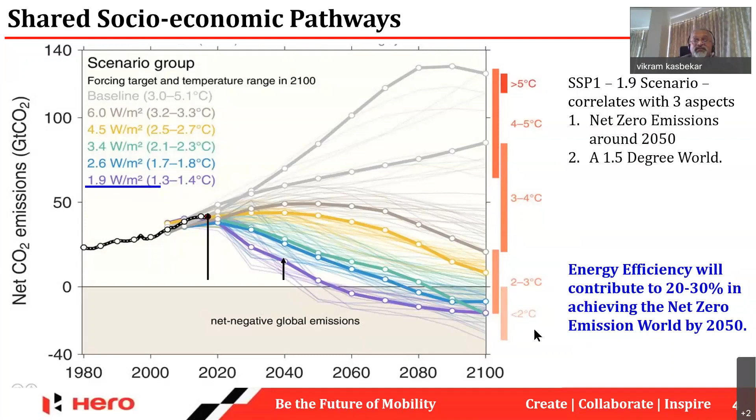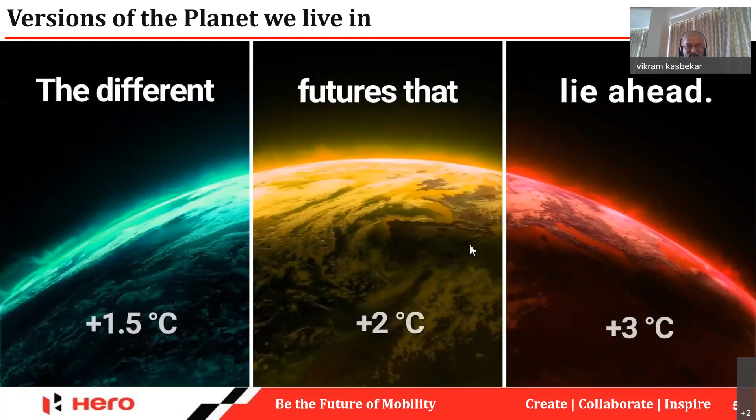So I think for the future generation, it's very important that we don't want the glaciers to melt, the rivers to dry off. Obviously this would be supported by new technology and other things that will come in. I spoke about the Paris Agreement some time back.

We want to keep warming to less than 2 degrees centigrade, ideally 1.3 to 1.4, but we normally call it 1.5 degrees. This is possible if we achieve net zero by the year 2050.

There are various innovative technologies coming through which we'll have to adapt to enhance resilience. Hydrogen has a very bright opportunity, though not in immediate terms, and even the government of India is coming up with a hydrogen policy. Going forward, these are the right steps for us to live by.

We look at Code Red. This was from the Intergovernmental Panel on Climate Change, where about 2,000 scientists came together and sounded a warning, calling it Code Red. So we have to take drastic measures now to adapt to climate change, enhance resilience, and align resources to address climate risk holistically.

It's very important that we undo what we have done earlier and harness new technologies innovatively to go forward from here.

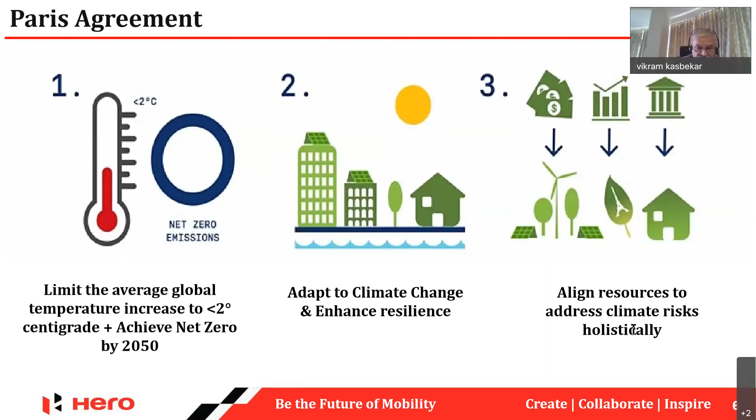I'll be taking you through some of these initiatives that have been taken at Hero.

Before that, I must say I had the good fortune of interacting with Professor Sonam Wangchuk, a brilliant person, very simple man, down to earth. He has been able to do wonders, what I've seen.

If you look at his contribution online, the ice stupas that were created, and the recent problems of pollution in the NCR region from crop burning—if the waste from crops is collected and processed, it can turn into insulation bricks.

He has also used the path of the sun, from east to west on the southern hemisphere, which gives sunlight and preserves energy inside the houses—absolutely no external energy required, using natural energy. These are low cost houses, a wonderful initiative to keep houses warm instead of burning chulhas, which create a huge amount of pollution in the Himalayan region.

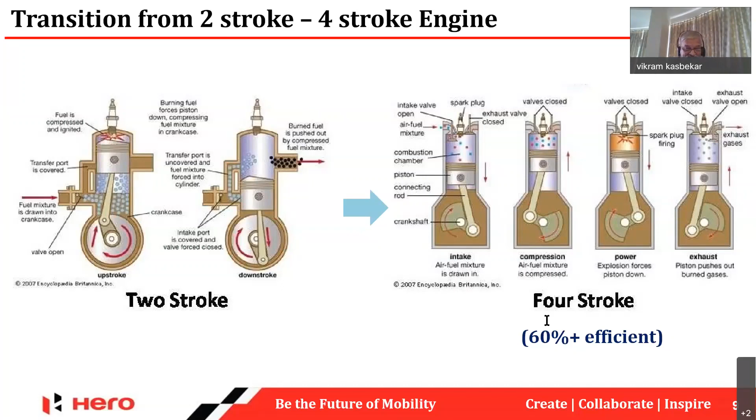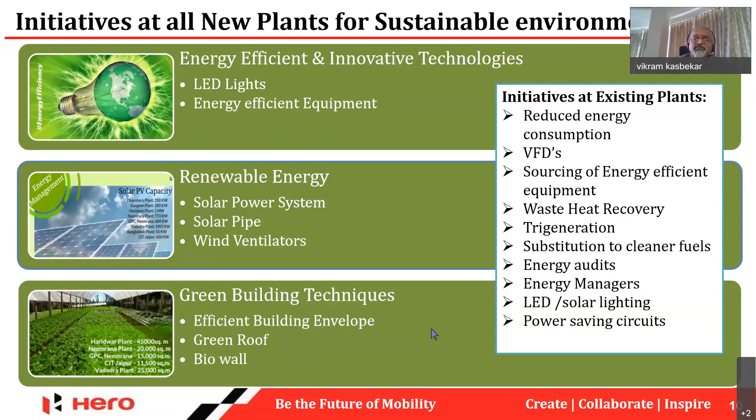On the solar plant, it is always very critical that we locate it at such an angle that when the sun moves from Cancer to Capricorn, it generally travels in the southern hemisphere from east to west, giving us maximum efficiency. One thing we have noticed is that these panels require regular cleaning to derive the best energy. During monsoons, cloudy weather and dusty atmosphere it doesn't work as well, but they operate most efficient at around 25 degrees centigrade.

If I look at the green roof initiative, this is our Haridwar plant - the largest green roof plant that we have put, 45,000 square meters of green roof. This gives a very cooling effect to the atmosphere, and there are various ways we have been able to establish this and work it out in a sustained way. In the Neemrana plant, we also have 20,000. So across all our factories and units, we have implemented the green roof.

And not only that, we have what we call generation of hydroponic plants. What you see here is a hydroponic plant, where we feed nutrients into the plants. They don't have soil, and the productivity of these plants is 5 times - whether it is cherry tomatoes, cucumbers, or any kind of vegetable, it gives huge amount of productivity. We just add some nutrients through the water.

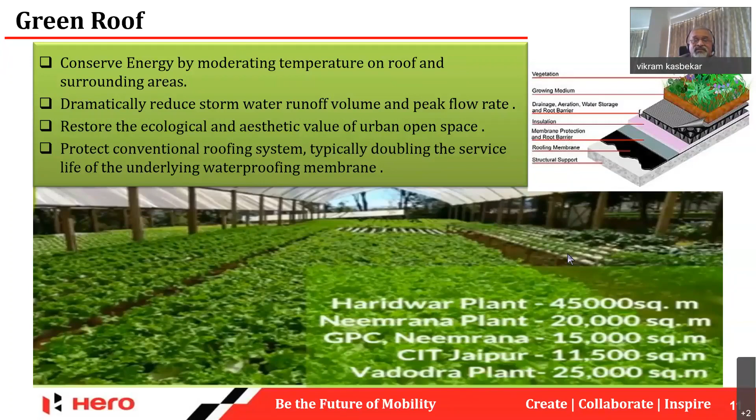And we control the temperature inside. Believe me, the lettuce and other things that you taste are really out of this world. I won't say it falls into the gamut of organic, but yes, it's not having any pesticide, and the taste is super. This is fed to and given to all our people across our unit - all our workers, officers, staff, they carry these things with them either in the canteen or at home.

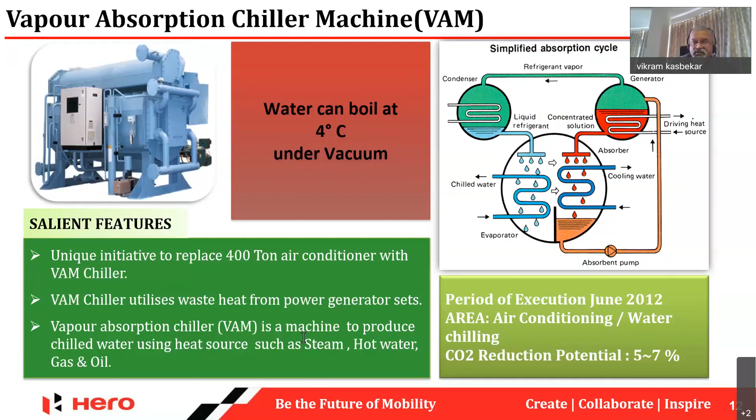So coming to the next part of it is on the technologies of VAM - I think all of you are aware of this technology, that under vacuum this is carried out. This is something that we are now using for air conditioning our offices and the engine assembly. This was done long back, where we use this VAM machine to cool our engine assembly, where earlier we were using a compressor. Now we use this technology to improve this, which is nothing but a delta T from the input coming from the heat source, which is the output of the radiator, and the input of the radiator is what we use to work this out.

This I mentioned about the solar panel. Another aspect which is very important is the cost benefit analysis.

If you have high efficiency solar panels, then the cost is high. So these are useful in areas where you don't have much space, but where you have space, a slightly less efficient one would also work. At the end of the day, it's just a cost-benefit analysis, which is very important.

We have put some pilots in some of our units, and the other part is purchasing renewable energy. So at the source, that is most efficient to avoid grid loss, and in the evening, since we are closer to the coastline, wind turbines can generate power from sunset to midnight. So both shifts sort of get addressed by this kind of energy.

Then, of course, the future energies are biomass, geothermal, hydropower. The only thing that the government of India and all the states must do is collaborate to see that the wheeling possibilities are taken care of very well.

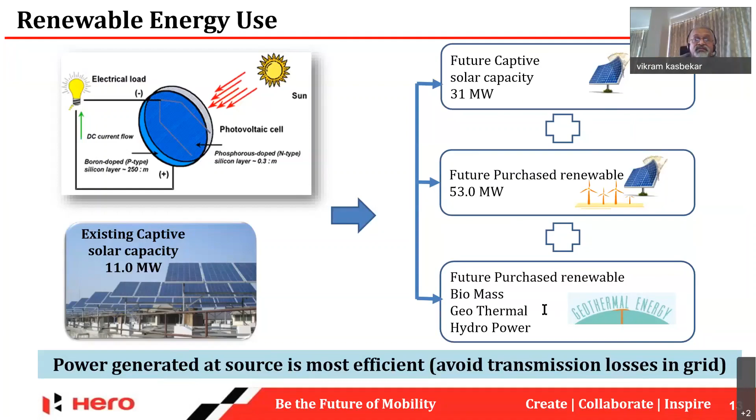So I go to the next one about utilization of waste as fuel. I did talk about the VAM chiller, the gas genset, also the exhaust for waste heat recovery of the boiler. So these things are being done continuously to improve our efficiencies, and at the end of the day, costs as well.

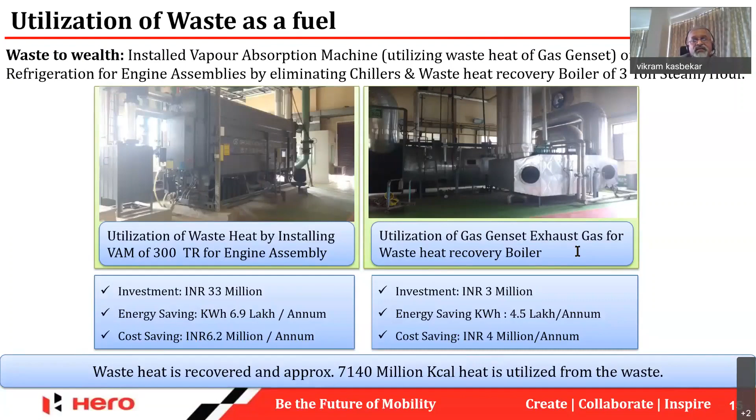Earlier we were using the waste heat recovery boiler, which was actually for burning the sludge. But today, as part of zero wastage, we don't want to burn that. We give it to the paint plant and cement plant, where it is used for co-processing.

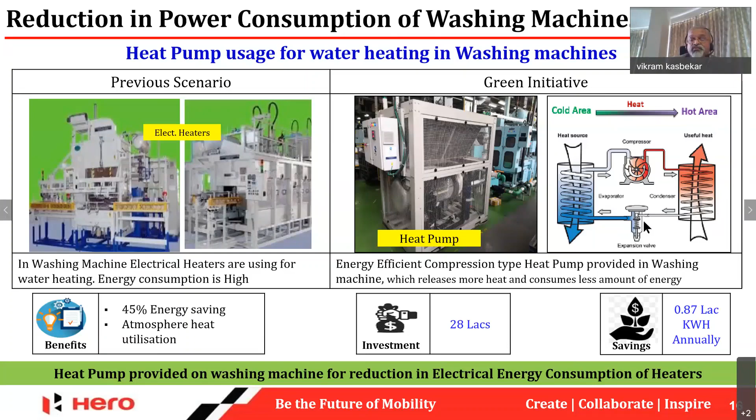Another thing is using the heat pump. Cold water is compressed, heated up, and that is taken into the preheating of the tank, so that energy utilized is less. And then, through the expansion valve, it cools down and goes back into the system.

The other thing is digitalization. Now that is the future. At the end of the day, we have got individual cockpits now at each unit, and by next year, we'll be combining this into a central unit.

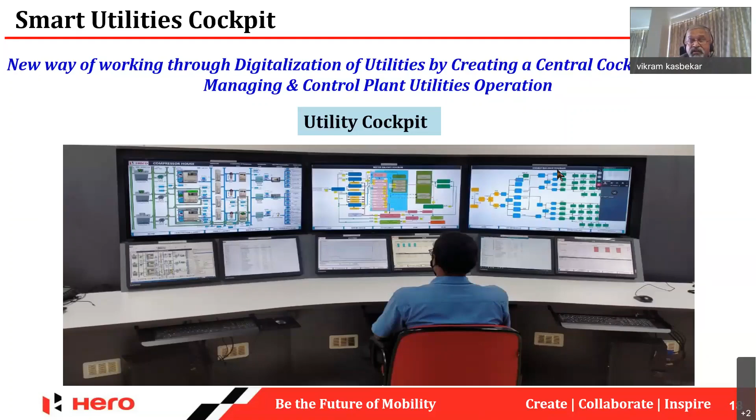So sitting remotely at some place, we'll be able to control all the utilities from one point, which will also result in good predictive maintenance—a stitch in time. We will know how a thing is going to fail and try to improve on the efficiency through real-time information.

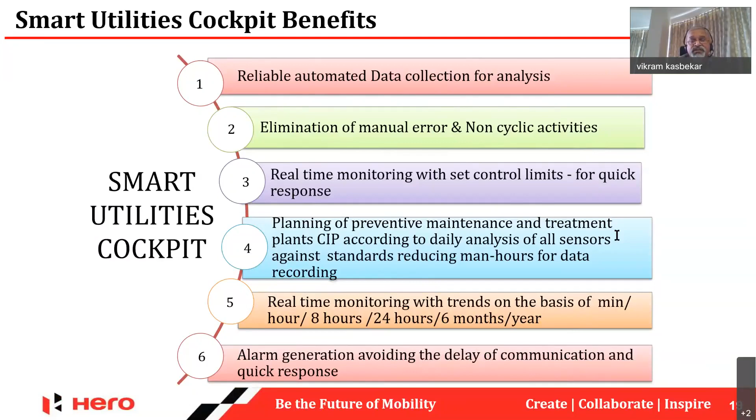The next page talks about all the benefits we arrive at with this. Of course, you need an analytics tool also to handle so much data, which gives real-time response, planning of preventive maintenance, and reducing inventory cost. So it's a win-win situation throughout, I must say.

If I look at system strengthening, which is again a very important aspect from the management point of view, a structure is very essential in a plant, and it goes like a pyramid starting from the plant head to the bottom, driving the management initiatives through this chain.

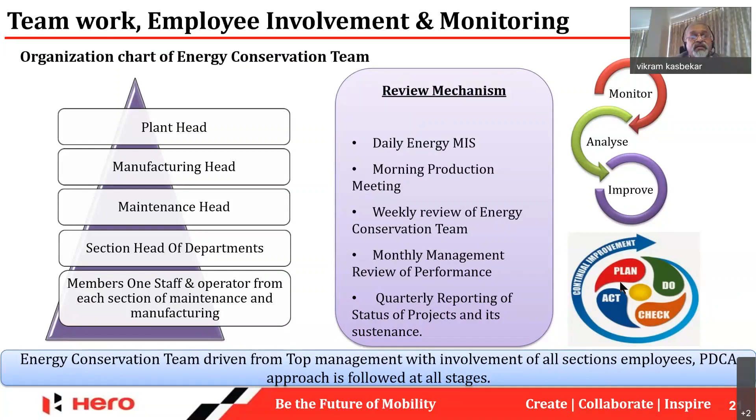So it's a regular review mechanism of PDCA. I think this is a very vital part of it. Otherwise, sometimes it's just a feel-good factor and it doesn't go along. But these are ways to sustainably create these initiatives.

If I look at the CII GreenCo Gold certification, our Hardwar plant, Gurgaon plant, and Dharuhera plant are certified Gold, and Neemrana also—Neemrana is Platinum. Our R&D setup is Platinum, which we recently got. So all the new plants coming up are going a notch above the old plants, and we are finding ways and means to improve the old ones too.

I must thank the GreenCo initiative by CII for supporting us in this matter. They are very, very tough. They have got a very structured way of evaluating this, and continuous improvement is very essential. I would urge all to adopt these kind of things to really improve their efficiencies.

Then, of course, OPEX through TPM, very practical use on the shop floor. Waste reduction, rejection, so you don't unnecessarily run the machines, and time and breakdown losses, all those factors contribute to the carbon reduction.

And then, of course, without people, nothing can be done. So training of people is a very vital part of it, and we need to see that this awareness is created. In fact, a lot of these learnings which I got from these people, I've implemented at my home also. And believe me, it works.

ISO 50001 is again a very good standard for energy efficiency, and this is something which I would urge many industries to follow. It's establishing a very systematic process of how we should be improving energy efficiency.

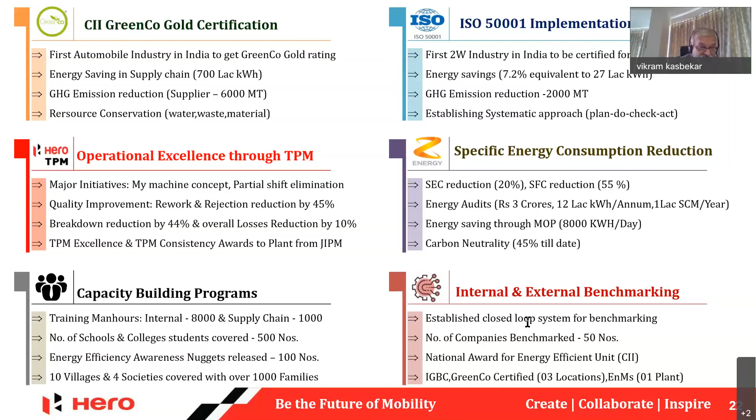I talked about the deployment. So the management policy, how it is deployed from the plant head policy, where various things are written here. And of course, one of the things is to reduce the total product carbon emission. Then the manufacturing head focuses on reducing the manufacturing cost, and controlling maintenance cost to achieve manufacturing variable cost.

I told you earlier that in a manufacturing plant, typically 50% of the manufacturing cost is attributed to power. So at the end of the day, when you take up all these energy efficient initiatives, it does help your bottom line.

At Hero, we have been having a power strategy that we roll out every 5 years, and every year we keep on adding new initiatives because nothing is stagnant. In the past 2 decades that I've been with Hero, I've seen how we have evolved from LDO and DG sets to gas gen sets and now to newer technologies. And I think as we go forward, there are many more things in line to come.

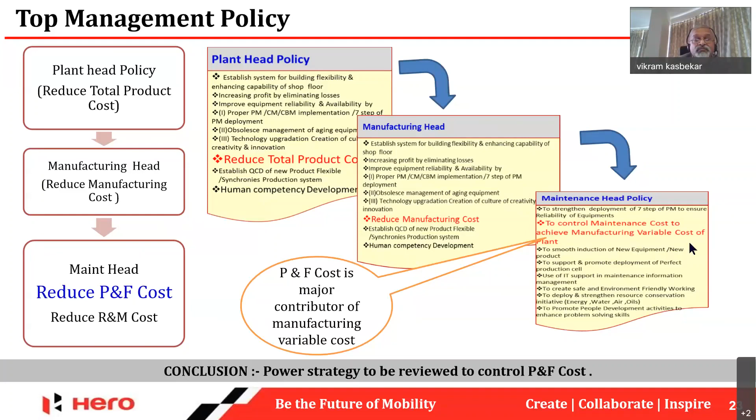But today, the demand lag is there thanks to the pandemic. But as we go forward, we definitely see a bright future where the requirement would be high. So any kind of new person who comes in is given a proper induction.

So it's a culture building for power energy efficiency, continuous awareness sessions. A simple thing like switching off the light when you go out of the room is important. And employee involvement, they own it. They have various competitions, so at different things people feel they are wanted. And this goes in for inclusive involvement of people across.

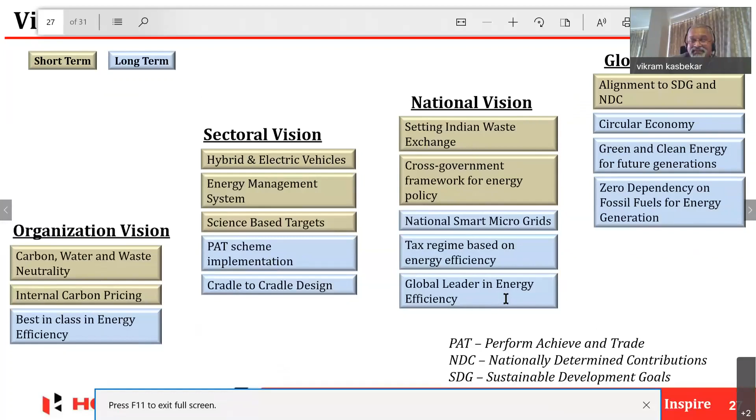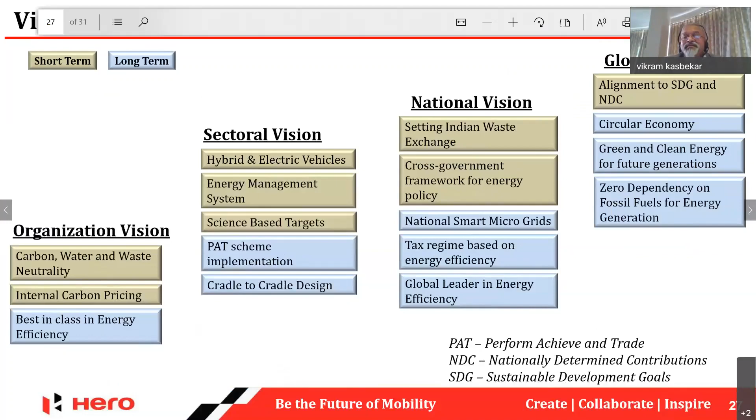Oops. I don't know why this is not moving. Some technical error. I'll do that manually now.

Then, of course, improved efficiencies and technology, promoting knowledge in various ways, because knowledge is going to be power, and technology, which is evolving so much, needs to be harnessed. Future of mobility - again, improved generation, EVs, which is going to come through, local manufacturing. I did mention about the generator side, because we need energy. Energy is important, but it has to be sustainable. Then the solar part I've already mentioned.